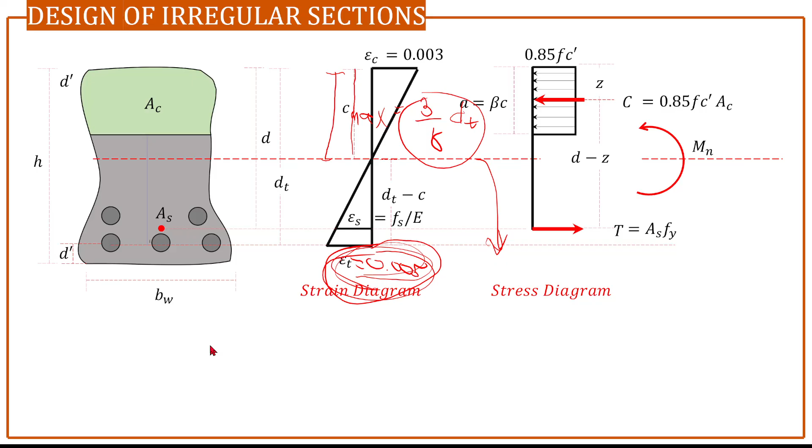So let's start to solve this, problem number three. This is problem number three of our discussion about irregular sections. We're done with the analysis. Now let's design. For this problem, the beam is to support the given load as shown.

If FC prime is 40 megapascal and Fy is 276, stirrups diameter is 10 millimeter, and concrete cover is 40, determine the number of 20 millimeter bars to ensure adequacy.

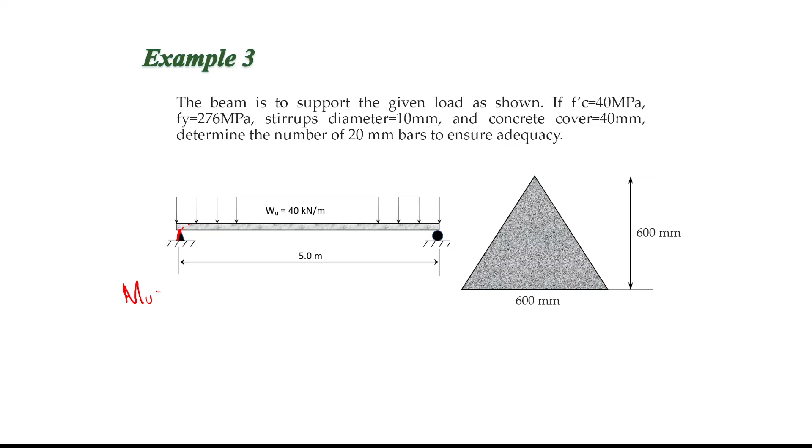Before we check the adequacy, we actually need to solve the maximum moment of this beam. The maximum moment, this is already factored, so we have Mu equal to Wu L squared over 8. This is just a simply supported beam. So 40 times... this is already factored, so we don't have to perform 1.2 dead load, 1.6 live load, or any load combination. So WL squared over 8.

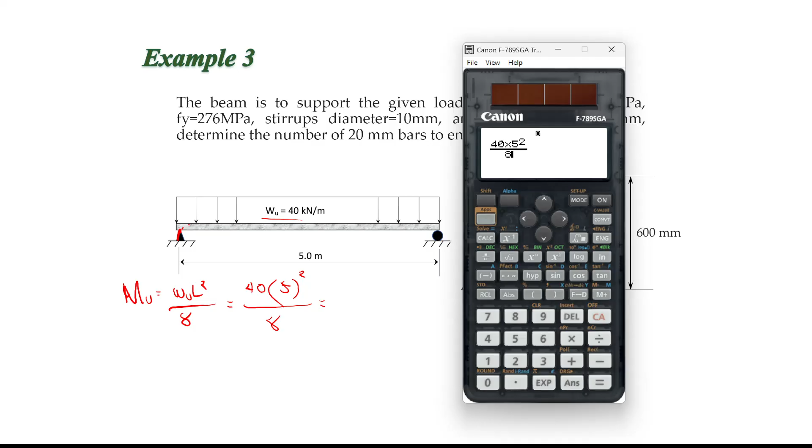Later we will compare this value to the value of the capacity. So what is the answer here? We have 40 times WL squared over 8, giving us a moment of 125 kilonewton meters.

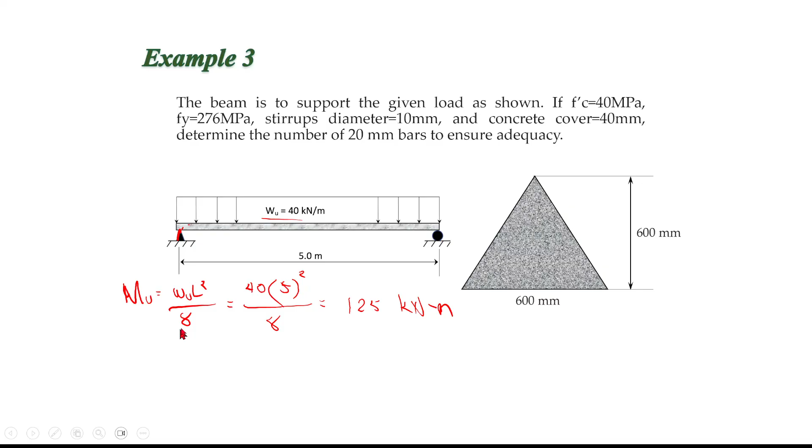So we have to design a triangular beam section which can carry this factored moment of 125 kilonewton meter. Let's start the design.

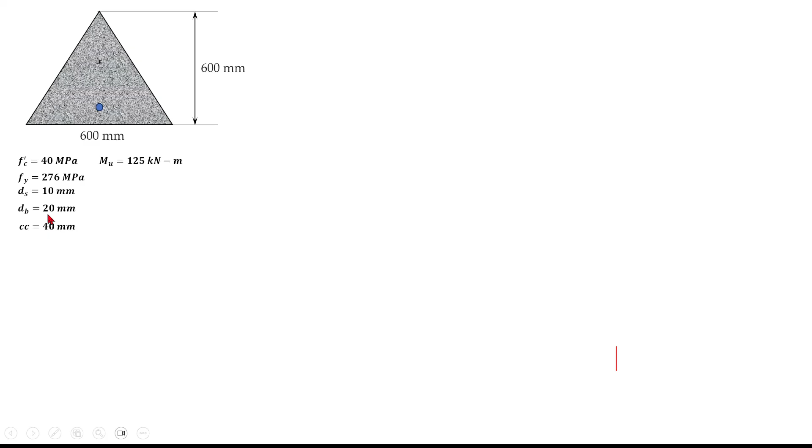Since this is a simply supported beam, we have to position the tension reinforcement at the bottom of the triangular section. So this will be our shape. We have a moment, FC prime, Fy, diameter of the stirrups, the concrete cover, and the diameter of the bar. Let's draw the stress strain diagram.

This is your strain diagram, triangular. Again, the strain on the extreme compression fiber, in this case the apex of this triangle, is equal to 0.003, the maximum allowable strain for the concrete. This is the neutral axis C, and this is your ET, which will also be equal to your ES. Now let's solve the effective depth.

The effective depth is the total depth, 600. We still need stirrups here even with an irregular section. So we have concrete cover, stirrups, then the diameter of the bar over 2.

So therefore, the effective depth is equal to 540 millimeters. Okay, so let's draw this, this will be the depth of compression block. So if we will draw the stress diagram, this will be the stress diagram. So the stress that we have here is the uniform stress.

acting on this area of compression block. Okay, so the compression force here is no longer 0.85 FC prime A times B, because the area of compression block is not A times B. That is not a rectangular area, it is the area of a triangle. So we put here AC, area of compression block.

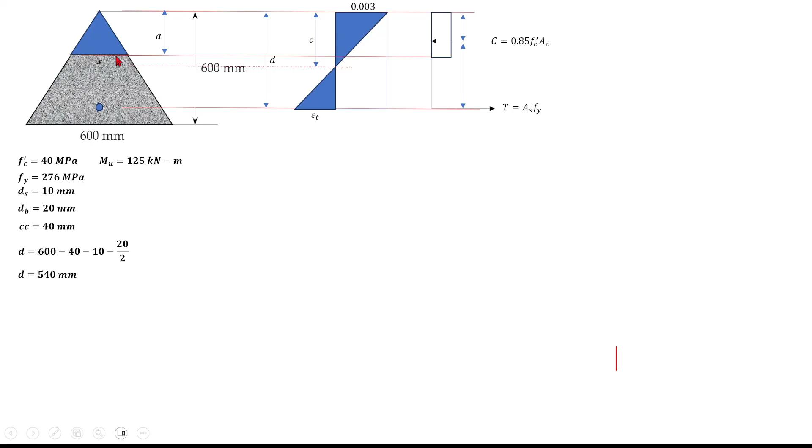Okay, so how do we solve this area of compression block? This is just the area of this triangle. So let's say the height is A and then the base is X. So that's our unknown. We have to compute the value of A in terms of the value of X. So we can solve this using ratio and proportion.

By ratio and proportion, this area of compression block is similar to the area of your triangular beam. So by ratio and proportion, we have base over height of this smaller triangle is proportional to base over height of this whole beam. So with that, X is just equal to A.

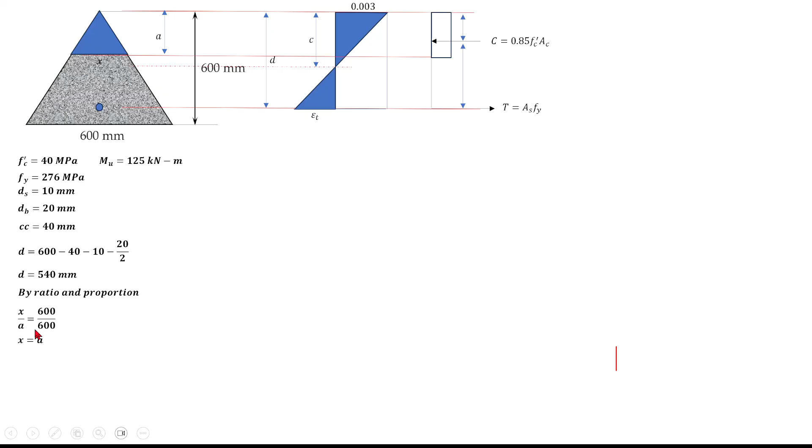So we can replace now the area of compression block. Instead of writing AC, we can write this area. Since X is just equal to A, therefore area of triangle is 1/2 base times height, so we have 1/2 A squared.

Okay, so anyway, what is the location now of your compression force? Take note, guys, the location of compression force is not on the center of A, because this is not a rectangular area of compression block. It should be located at the centroid of this triangle.

We know that the centroid here, from the bottom, is 1/3 of A. To the top, that is 2/3 of A. The measurement of the centroid of this triangular compression block is 2/3 to the top. So if this distance is from the extreme compression to the centroid of your area, that is the effective depth. Therefore, the distance between these two forces is D minus 2/3 of A.

Okay, we begin by using the moment equation. Once we design, we always start with the moment equation. We just use compression, taking moment about tension, so that we can solve here the depth of compression block.

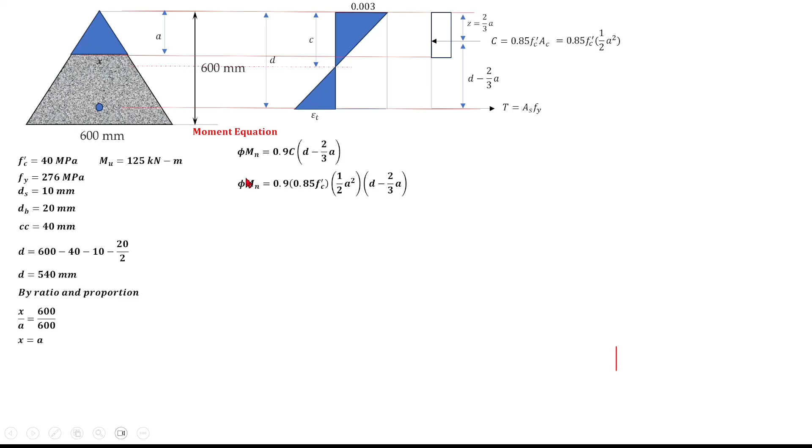So as we substitute C, we have 0.85 FC prime, 1/2 A squared. Okay, so we substitute phi Mn. So on the design, we always equate the phi Mn to the factored moment. So we just equate that. Therefore, our phi Mn will be also equal to your factored moment. So let's substitute.

So phi Mn will be your Mu, 125 times 10 raised to 6 — let's just convert this into Newton-millimeter. So 0.9 times 0.85, FC prime is 40 megapascal, 1/2 A squared, this is the area of compression block, times D minus 2/3 of A. So the value of A is equal to 134.713 millimeters.

So let's store this value as A. So after that, since we assume first that this is a singly reinforced beam, or only tension bars are required, we have to check if it is really tension-controlled, or if it is really doubly or singly reinforced.

So we have to check the strain at this point. Or we can check the strain here. The strain should not be less than 0.005. Or it's possible that the value of C should... I mean, for the strain, for a singly reinforced beam, the ET should not be less than 0.005.

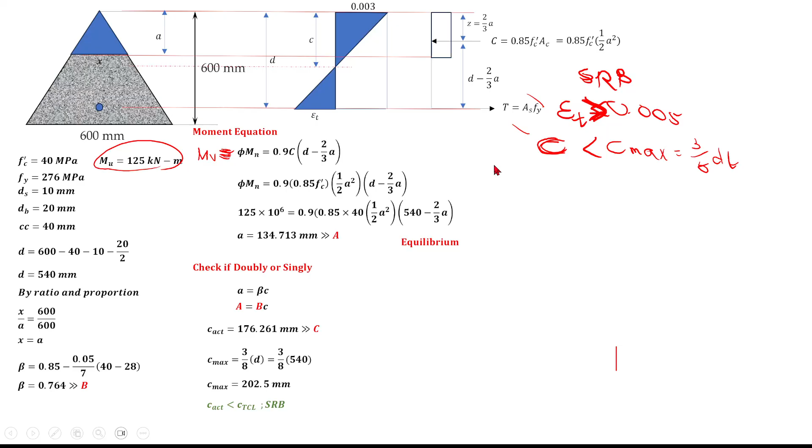With that, we have to design this as singly reinforced. So what's next? We can use the equilibrium equation, since our goal here is to solve the area of the tension bars. So let's use equilibrium, knowing that compression force is just equal to the tension force.

So let's substitute. C is 0.85 Fc prime times one half A squared, and then tension force is As times Fy. Take note, class, the Fy here is always yielding. It should not be Fs, it should be yielding Fs, which is equal to Fy. For the design, it should always be yielding.

So we already have the value of A, so our unknown here is just As. Let's substitute: we have A stored at A, Fc prime of 40, Fy of 276 megapascal. So we can solve here the As. This is the required area based on the moment of 125 kilonewton meter.

However, this is not yet the final answer unless this is greater than the minimum area of steel required by the code. So we have the minimum area of steel required by the code, 1.4

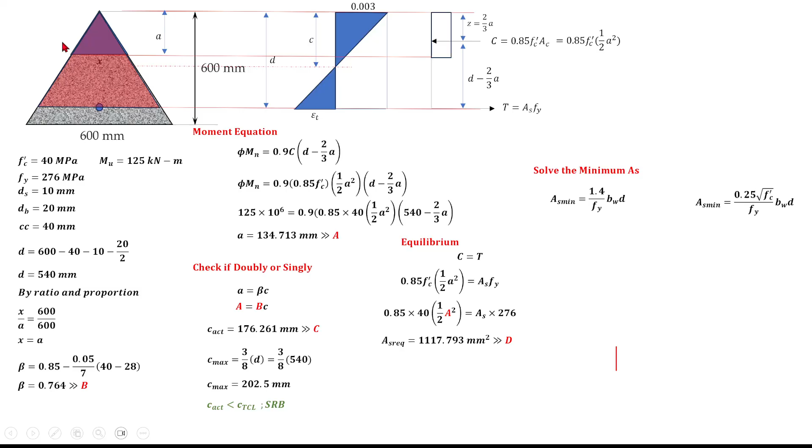FYBWD. But how is it always BW times D? So what will be the BW here? Is it BW times the effective depth? No, if we have a regular section, BWD is actually the equivalent area up to the effective depth. Last time, if that is a rectangular beam, it's just BWD. This one is rectangular, so BW times D.

However, this is no longer a rectangular area up to the depth of the compression block. So it shouldn't just be BWD. It should be the area up to the effective depth, not the compression block, but up to the effective depth. So we have to solve that area.

So solving that area of the triangle, we need this base. This will represent the base of this triangular area, which will serve as the area of our BWD. So by ratio and proportion, we have x.

This triangle is similar to the bigger triangle, so we have x1, which is up to the effective depth. So x1 over effective depth 540 is proportional to 600 over 600. So we can have this triangle's width, that is 540. So we now compute the BWD, that is just the area of this triangle, one half base times the height.

So the BWD is 145,800. So we can now compute this As min, 1.4 FYBWD. That is 739.565. Next is 0.25 Fc prime over Fy BWD, that is equal to 835.254. So per code, we have to select the largest value of the minimum steel area here.

So the governing minimum steel area is 835.254. What we are going to do is select the largest value. Of course, this is the required and this is the minimum. So you just need to select the larger value from the minimum and the required steel area.

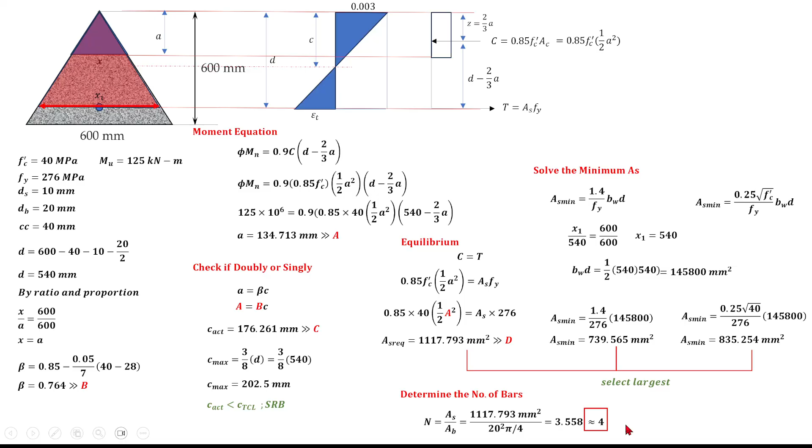So next problem. Problem number 4: determine the number of 20 millimeter diameter bars to adequately support a maximum moment of 170 kilonewton meter. Use Fc prime of 28 and Fy of 415 megapascal.

Stirrups diameter 10 millimeter and concrete cover of 40 millimeters. The top width is 300 millimeter and the bottom width is 350. The height is 500. So this is the dimension of the beam. So we have a 170 kilonewton meter to be designed using this trapezoidal beam.

So the location of the tension reinforcement is located at the bottom, meaning it will resist positive bending moment. So this is a positive bending moment.

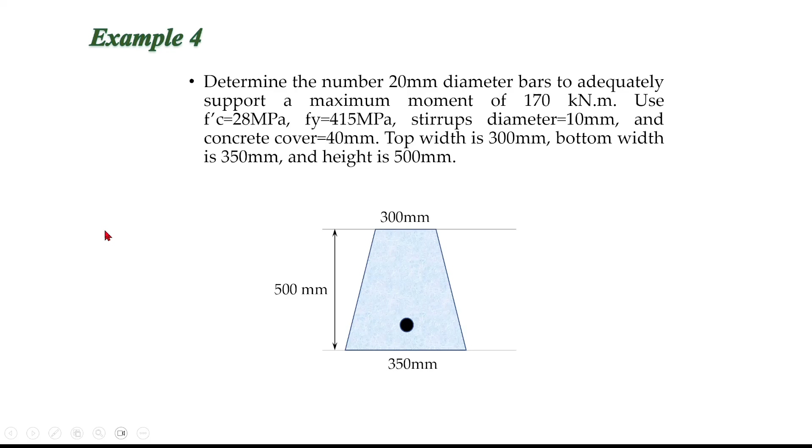So let's solve this given the following parameters and the factored moment. Let's draw here the effective depth. The effective depth is located here.

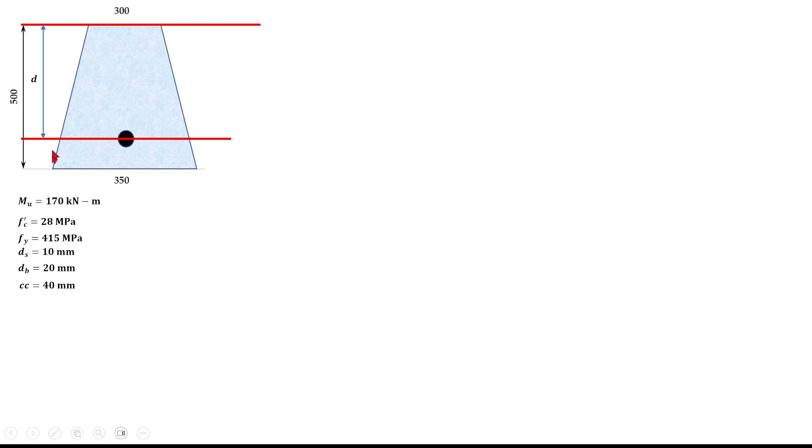Let's solve the effective depth first. Of course, there's still the steel cover and the stirrup. So total depth minus concrete cover. We assume singly reinforced - every time we design, we assume that it is singly reinforced. So 500 minus 40 minus stirrups and the diameter of the bar, that is 440.

Anyway, I will no longer draw the strain diagram since we just have the similar strain diagram, and any cross section has the same strain diagram. So let me just draw the forces from the stress diagram. I'll draw the depth of compression block.

So the area of compression block here is trapezoidal, meaning this is an irregular section. So again, the only difference in an irregular section is just the area of compression block is no longer rectangle. So it is really hard for us to identify the centroid if we have a trapezoid.

We can get the area of this trapezoid. However, the centroid - okay if you memorize, if you know the centroid of the triangle. What if you forgot the centroid of the trapezoid? What is the centroid of a trapezoid? If you forgot, it's okay class.

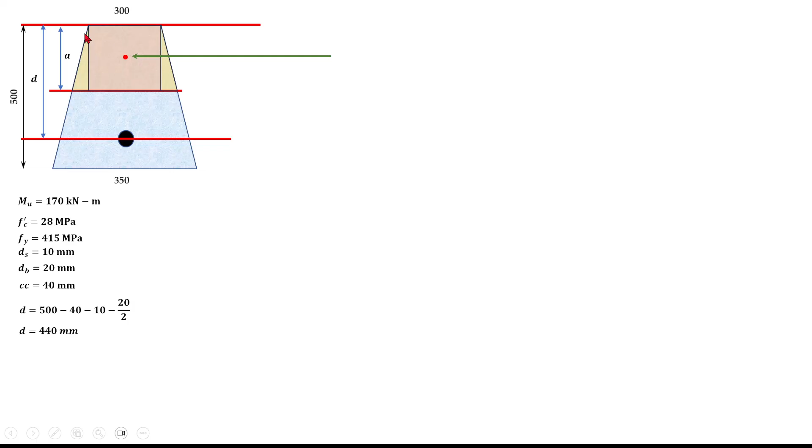For this rectangle, we have to solve the force located at the centroid of this rectangle. Let's say the centroid is here, the force that is at the middle of A. So at the middle height of A, the centroid of this rectangular area is located.

So we solve the compression force acting on this rectangular area. We know that force is stress times area. The stress is 0.85 Fc prime, and this is the area of the rectangle, so A times 300.

For the triangular part, the centroid of this triangle is located at 1/3 from the base and 2/3 to the height. This triangle has a similar location of the centroid.

Let's join the two triangles into one. We will combine these two triangles, so we have area of triangle equals 1/2 base times height. Our base is 2x and the height is A.

For the compression force, we'll just combine the two triangles since they have similar centroids, similar position of the centroids. We'll call it C2: the uniform stress times the area of this triangle, 1/2 height times the base of 2x. Let's say this is x.

Next, the tension force. The tension force is located at the force at the tension bars. Since this is designed, that is As Fy. We need to identify the distances of the compression force to the tension force.

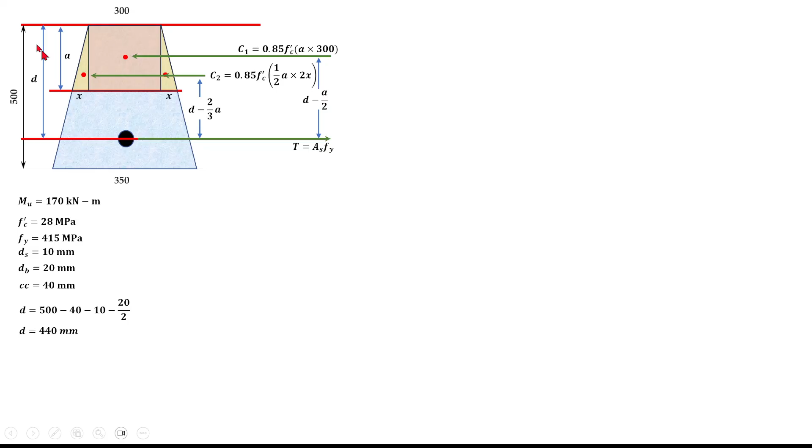Next, C2 to the tension force. We need these lever arms in getting the moment equation. We know that this centroid to the top is 2/3 of A, so the distance between these two forces is D minus 2/3 of the depth of compression.

Now we can use the moment equation, taking moment about the tension force. Compression force times the distance, taking moment of compression forces. So the factored moment capacity is the reduction factor times moment of C1 going to the tension, then C2 going to the tension force.

Instead of using one force for this compression block, we separate it into two forces so that we can easily identify their individual centroids. However, we have an additional unknown here, not just A. After the moment equation, you should be able to solve the value of A.

However, we have here the value of X, so we should replace this X in terms of A. Let's look at this triangle. By ratio and proportion, this triangle should be similar to this bigger triangle.

What will be the width of this triangle? This is 300. What will be the remaining here? Since this is symmetrical, 350 minus 300 gives us remaining 50. So you have 25 on this side, and 25 here.

So we can now replace this in C2. If we have 2 here, we can cancel this, and then replace x with 0.05a. So what will be the value of C2? C2 will be 0.85 Fc prime times 0.05a squared. Why does it become a squared? Because we have a here and then x in terms of a, so a squared, with 0.05 as the coefficient.

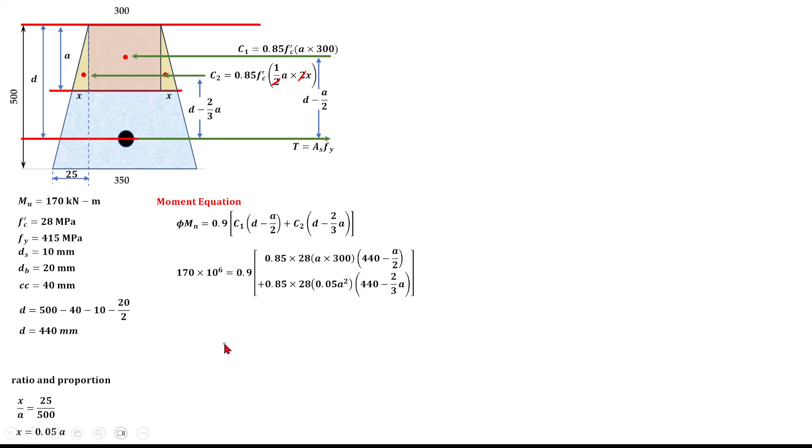Solving for A, so we have 64.187 millimeters. Okay, so after that, we check if it is singly or doubly reinforced.

So we solve the value of C. To solve C, we are required to solve the value of beta. However, beta here is just 0.85 since FC prime is 28. So let's solve the value of C: we have A over beta. A stored at A, beta is 0.85. So anyway, 0.85 is beta. So the value of C is...

75.514. Okay, so let's compare that to the maximum C, that is 3 over 8 of D, dt. Since dt is just equal to D, so we have 165, it should be dt, 3 over 8 of dt. Anyway, dt and d are equal, so that is 165 millimeters.

So as we can see here, the compression force, the C, the distance of the neutral axis, compared to the maximum C, is still less than that. So the actual C is still less than the tension control limit C. So therefore, this is still tension controlled, so we design this as single reinforcement.

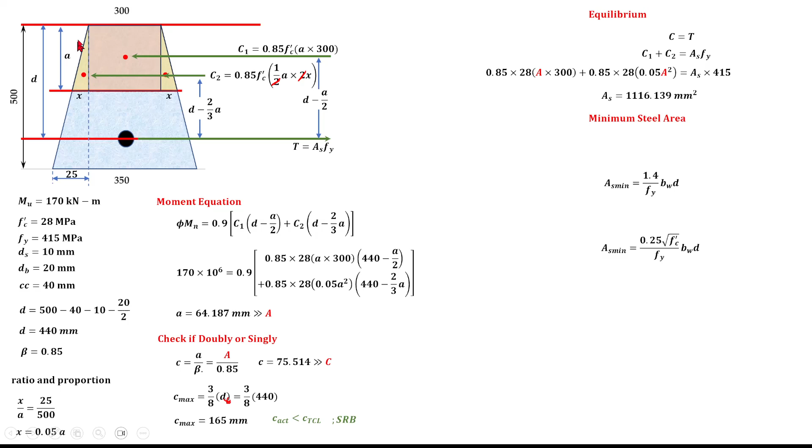This area, up to the effective depth, this trapezoidal area up to the effective depth. So we need to get this area, the area up to effective depth. So we have now, this is just a trapezoid, we need to get the area of this trapezoid. We have B1, we don't have, we have the 300, but we don't have the other base, so we have to solve this base.

To solve that, we can use again similar triangle. So this triangle, we need this base, I mean distance, no? So let's say this is x1. So pag na-solve mo yan, i-add mo na lang yan. So we have here x1, and x1 on the other side. So this is 300, so just add x1 to x1 doon sa 300.

So, using ratio and proportion, we have x1 over 440. X1 over 440 is proportional to 25 over 500. So, this is your ratio and proportion. So, solving x1 will give us 22 millimeters.

So, therefore, 22 magkabila, 22 here, 22 din dito, kasi this is from this point, this is 300. And we have here 22, we have here 22. So, therefore, B1 is 344.